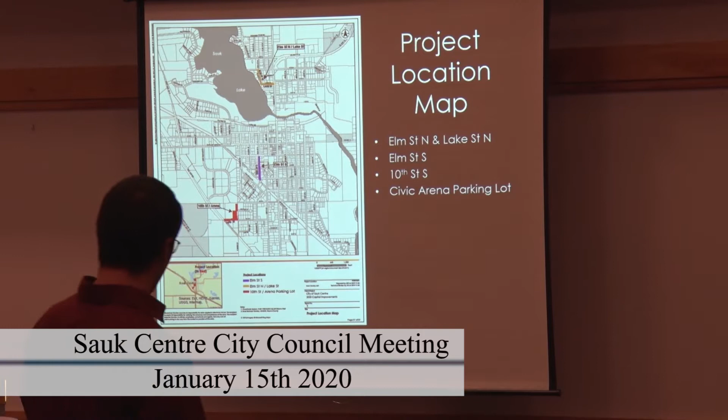You see it's kind of in brown - that's the Elm Street North and Lake Street North area. We have a central area in purple, that's the Elm Street South area. Then the red on the south area, there's actually two different areas: one is 10th Street South, which is the East-West street there, as well as the Civic Arena parking lot. So that's the areas we're talking about with this public hearing.

Existing infrastructure condition: the North Elm and Lake Street area water main and sanitary sewer is aged, installed originally back in the 1950s for most of it. Water main is undersized for regional system distribution. That was identified way back in 1995, that we don't have enough fire flows in that area for firefighting needs. Storm sewer drains directly into Sauk Lake without any treatment, and also lacks adequate structures to provide for drainage right at that corner.

The streets are aged and deteriorating. There's no flexibility, the pavement is cracking, the foundation is failing. They're old streets. Lake Street is also a narrower street, about 4 feet narrower than most of our streets. Normally our residential streets are 36 foot face to face. You'll see the design we're thinking about for this in a little bit.

South Elm Street water main and sanitary, once again it's aged and failing, very old in there. There's numerous sanitary backups that have occurred there. Jetting happens - we have to do that multiple times a year just to keep the sanitary sewer flowing through there. A lot of roots and those kinds of things are problems in that area. Once again, the water main is undersized in that area as well.

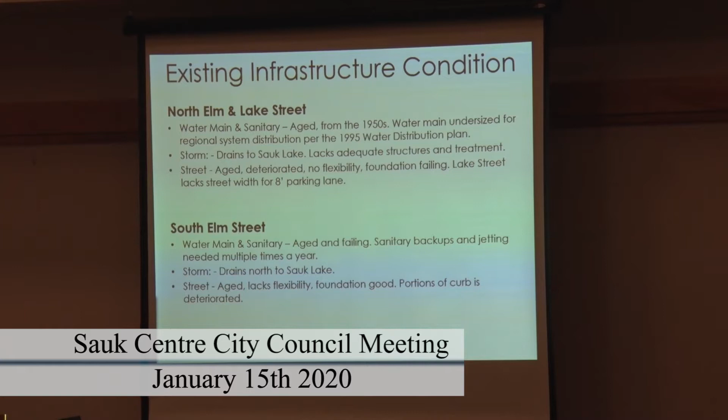Storm drains, once again, drain directly into Sauk Lake. We've dealt with some of that through other projects that happened before this for South Elm Street. The street itself, once again, is aged, alligator cracked, and lacking its flexibility. The pavement is simply worn out, too worn out to do a mill and overlay any longer. Portions of the curb are also deteriorated in that section.

10th Street South: in that area, the water main and sanitary sewer, PVC, is actually in good condition. It wasn't put in too terribly long ago. Everything is fine from a utility standpoint. The stormwater, the curb drains down to Beltline and goes into the ditch through there. No real issues with stormwater there.

The problems on 10th Street is the street itself. It's aging, deteriorating - actually deteriorating prior to its life. There's no flexibility in there. The foundation essentially is failing due to groundwater issues, which I neglected to mention in that north project. Primarily, we believe that's related to groundwater issues as well, causing the street to fall apart through those areas. We see the same thing in our parking lot area across the street at the Civic Arena. It's the elevated groundwater, not allowing structural strength below the pavement, and the pavement is failing and falling apart. So it lacks sub-drainage.

The Civic Arena parking lot is similar. It's aged, deteriorating, we don't have the flexibility, we don't have that foundation drainage. There's too much groundwater in there - it's close to the surface, and we don't have strength for that foundation in order to hold the traffic up above it. So those are the issues through there.

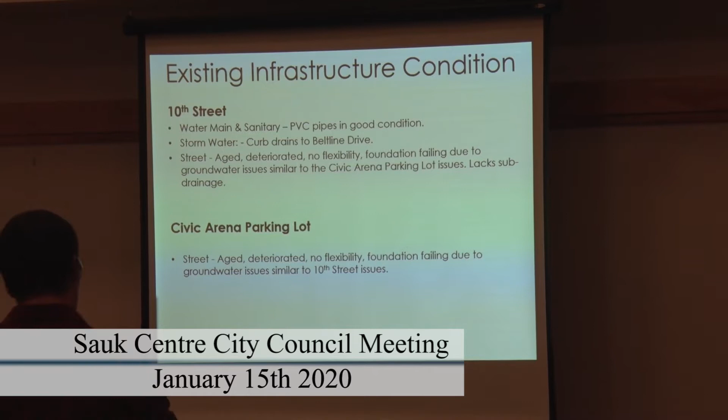I'll walk you through more of the proposed improvements we propose on these project sections. For the north, Elm Street and Lake Street, we propose to replace the sanitary and water mains. The existing water main is 6-inch, we're going to increase that to 8-inch for fire flows. New services out to the right-of-way. We propose to replace the existing street section. Lake Street is an existing roughly 30 foot width, and Elm is 36. There's two options for the Elm Street portion that I'll walk you through in a little bit.

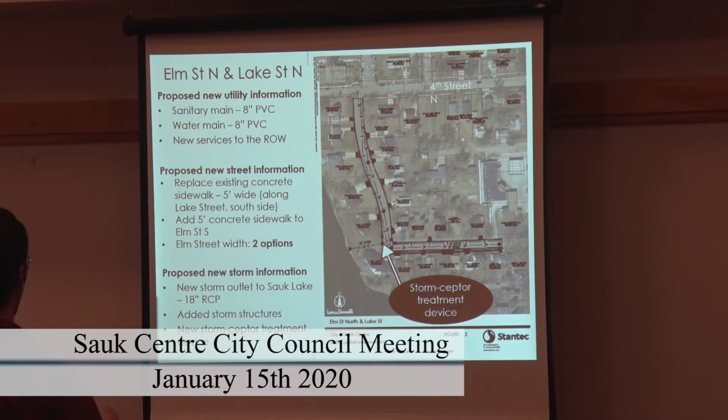We plan to replace the sidewalk along Lake Street, and another option is to add sidewalk on the west side of Elm Street and connect it up to 4th Street. So that's being proposed as well. The existing storm sewer currently drains to Sauk Lake. The plan is to add a few more structures in the low area to adequately drain that, to help with some larger events, to get the water out more quickly.

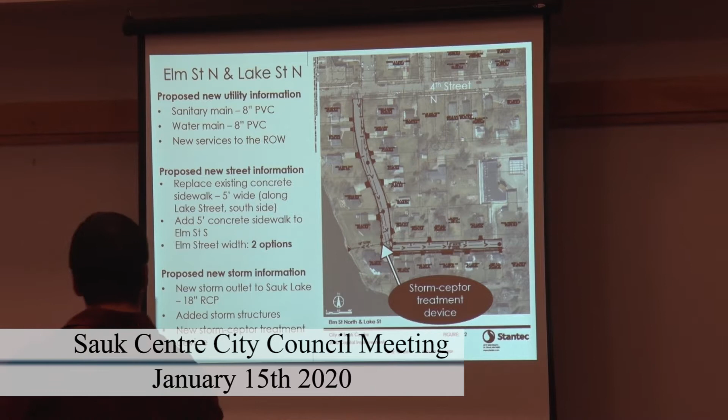So this visual shows you the existing right-of-way on Elm and Lake. The current right-of-way on Elm is 40 feet at its narrowest. Currently it's not wide enough for us to do our construction. The current right-of-way width is this blue line here. The curved greener, yellower line is existing curb.

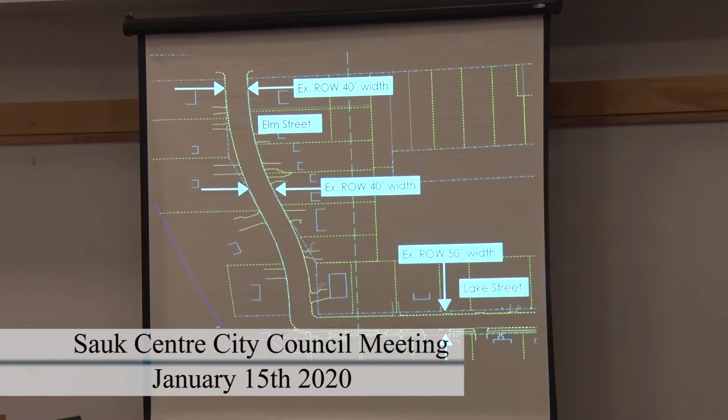In our proposed options, we have additional permanent easement included. The existing right-of-way on Lake Street is 50 feet wide, so there we have enough room to replace the 32-foot wide road.

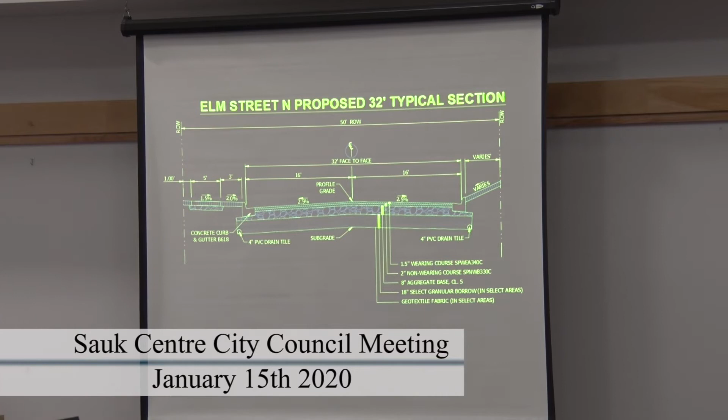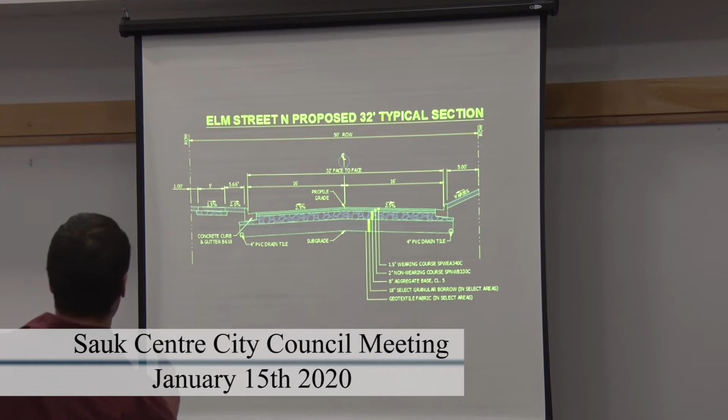The other option is to go 60 feet wide for the new right-of-way, which would be a 36-foot section. So the two options for Elm Street North are a 32-foot wide section or a 36-foot.

I have another graphic here to show you. This is the 50-foot wide right-of-way. We propose to purchase 5 feet on both sides to get to a minimum of 50 feet. There we can fit a 32-foot wide roadway face-to-face. The boulevard would end up around 5.5 feet with the sidewalk on the west side.

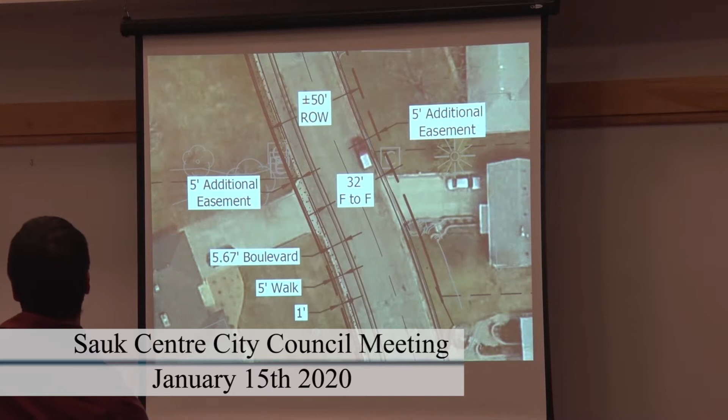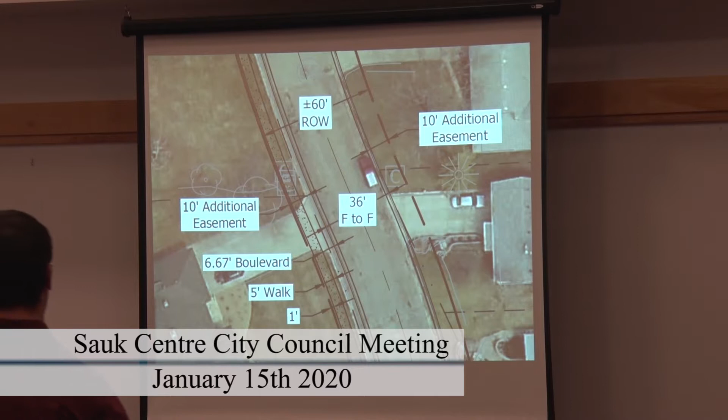The other option is 60 feet wide, so 10 feet on both sides to get to that minimum 60 feet. The boulevard would end up around 6.5 feet with the sidewalk again on the west side. So those are the options for Elm. For Lake, we think we can go with the 32-foot wide one, but we can come back to those two options and discuss further along.

If we jump to the Elm Street South portion of the project, there you can see the two blocks that we plan to reconstruct. We'll be replacing the sanitary, the water main, and services out to the right-of-way.

This section has a 36-foot wide roadway. We plan to replace it again with a 36-foot wide roadway, basically the same as it is today, with sidewalks on both sides.

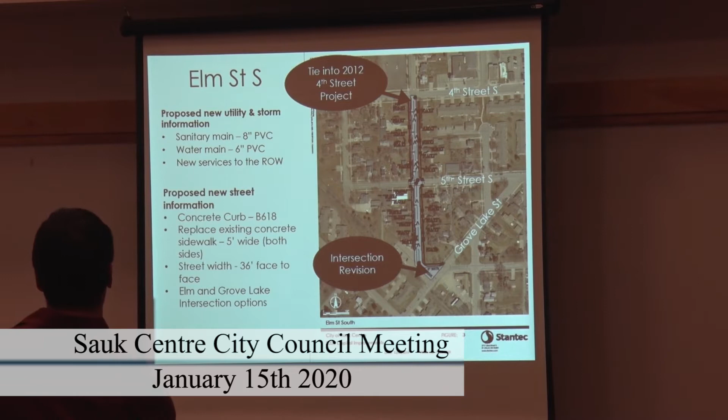The options for this one are on the south side, the intersection with Grove Lake. We'll be showing you two options for that intersection to better direct traffic. Right now it's all pavement, and there's no real direction, so we're not directing traffic there very efficiently. So we propose two options for that.

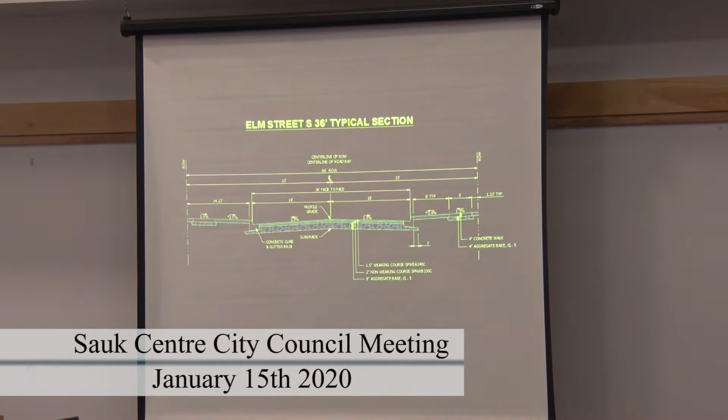This again gives you a profile picture of the Elm Street South roadway, so you can see the sidewalk on both sides. The roadway face-to-face is 36 feet, and the boulevard will be a typical and desirable 8 feet wide.

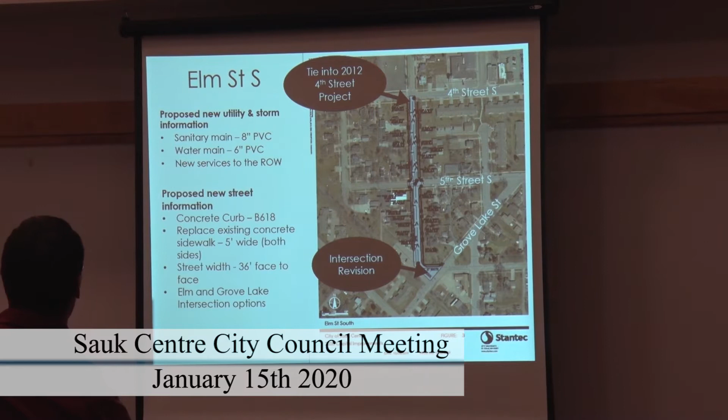Option 1 also keeps the center line aligned with 6th Street. Option 2 is in accordance with the city ordinance on intersection skews, and the wording says 80 degrees is the minimum, perpendicular is desired, which we have proposed for option 2.

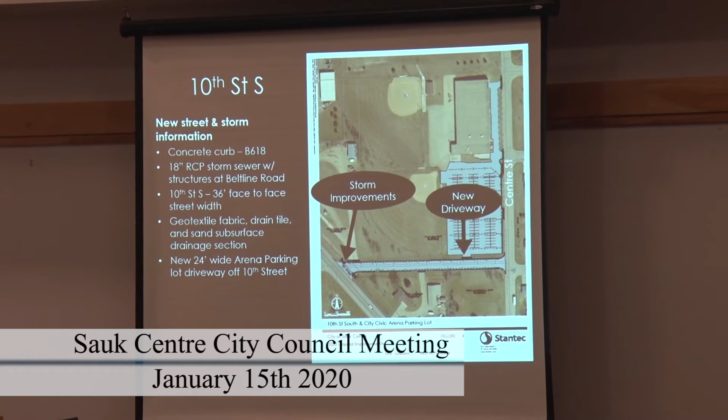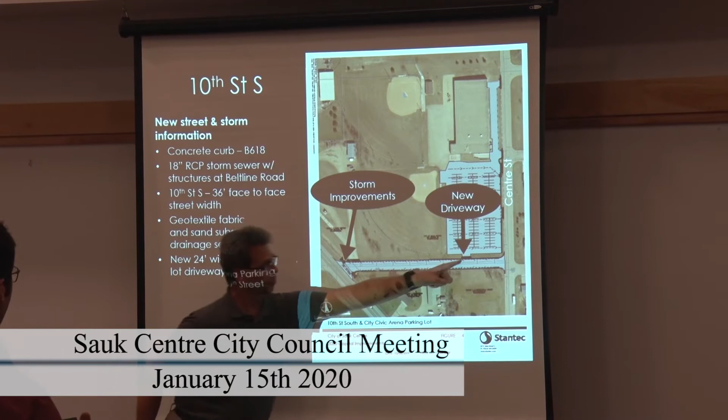What a sub-drainage section will do is wick the water away, allow it to drain through drain tile, and leave the aggregate base of the roadway high and dry with its strength. So that's what we propose. It's a 36-foot wide roadway today, and we propose the same roadway back. We would add a new driveway to the parking lot arena area for additional exit and entrance there. We would also add a couple structures along the Beltline roadway there on the left side of your screen.

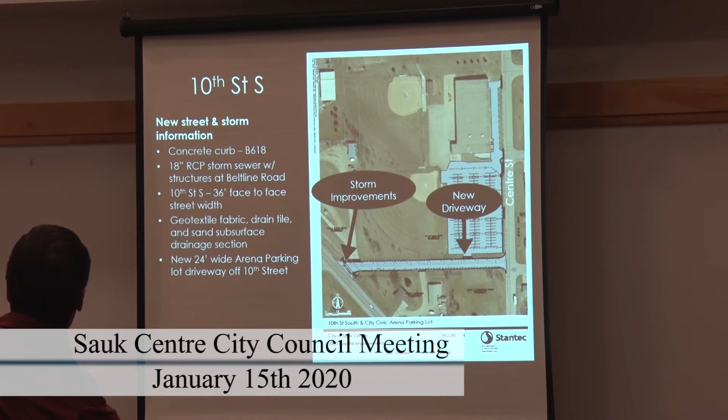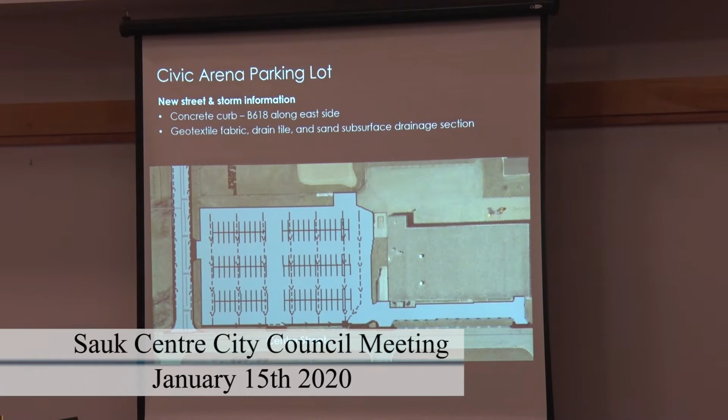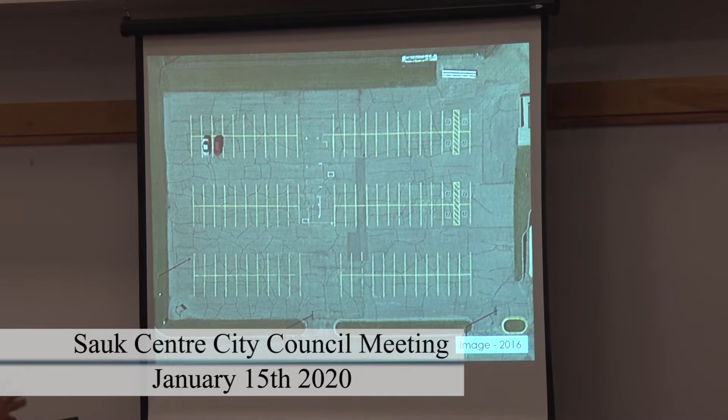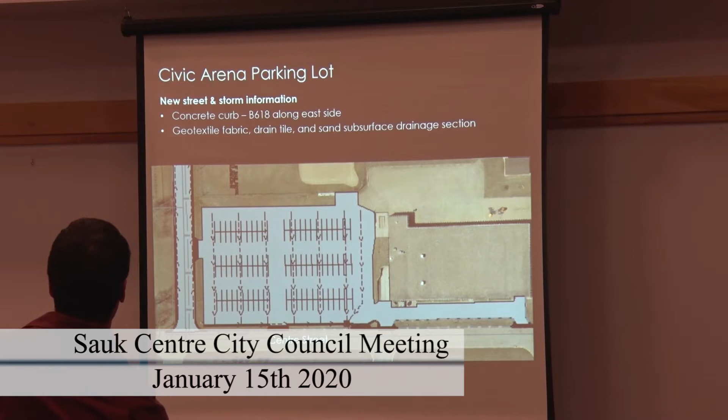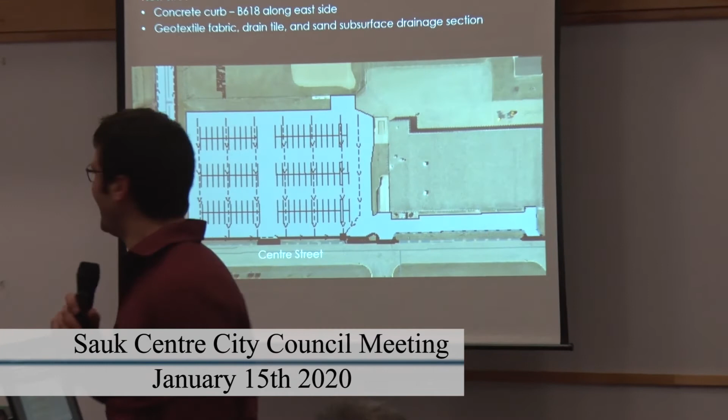Sure, so this is kind of typical. We've done this before in parking lots. The drain tile lines you see would be about 4-inch PVC drain tile we propose using. They would connect to a larger drain tile on the south or east side, the bottom of your screen, and go to the storm sewer. It's the same kind of concept as they use in field drain tile systems. You want to collect that water and get it to there. I think the spacing on that's around 50 to 75 feet, which is pretty typical for that kind of area.

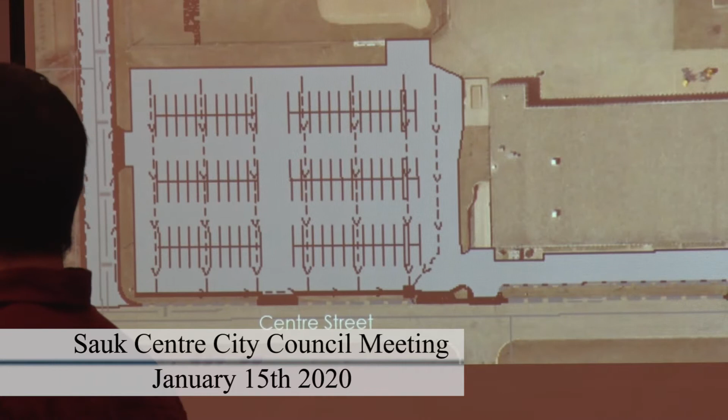On the street, if you think about it from that perspective, it's 1.5 times if we did it on either side of the street. It's a small picture and it kind of makes it look like it's real close, but it's really not. The bulk of the costs for the Civic Arena are going to be the materials, the bituminous, the Class 5, and the sand. The drain tile will be a smaller portion.

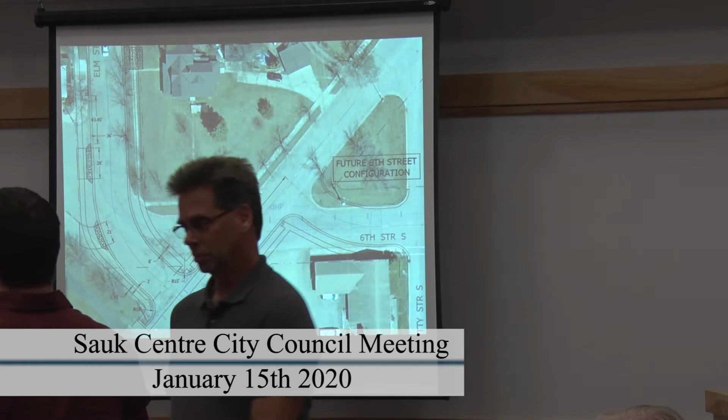Sure, so right now we propose just a grass area. There may be a chance to do some - I haven't looked at the soils up there yet - to do an infiltration pond. We may need some storm improvements in that area and intersection. We haven't got to that in our design yet, but at this point we'd be looking at just a grass area. And because that is right-of-way, that could be vacated and dedicated back to the adjacent landowner.

So that could be an option if we didn't use it for any other public purpose. The 6th Street shown on this configuration on the east side really isn't meant to be done with this project. It could be, but it's not meant to be — that's why the label says future. So if you can go back to the other picture.

What I was wondering, and maybe Ben can speak to this, is when it comes to plowing and road maintenance, the fewer corners you have to go around with the plow and wing, the better. What's your feeling, Ben, as far as your guys having to work around it? This option here is a lot harder to plow and maintain versus the other option. So the other option would be better for us to plow, for sure.

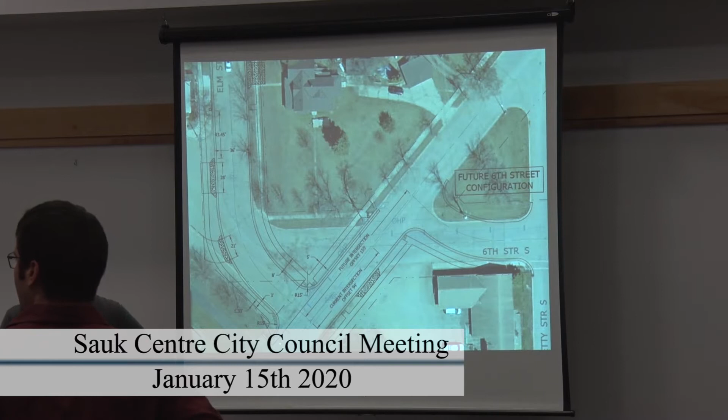One thing I wanted to point out, just so everyone knows, there is kind of an alley that goes back — there's a couple garages back in here. So that's what you're seeing right here, that's how that would enter back onto the street. So it's not cut off from those folks, either way.

So the parking lot by the ding dong — would that be their requirement to maintain and do snow removal on? It wouldn't be us anymore? The part that's off the street, right — we would basically no longer be maintaining that.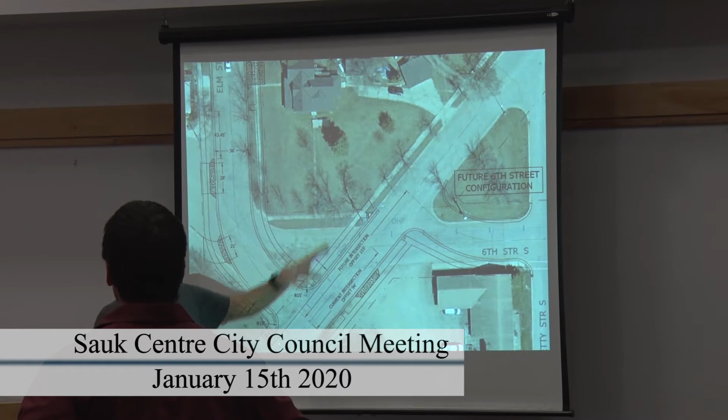Technically our right-of-way — this is actually Elm and 6th. In reality, the right-of-way is currently Elm Street and Sixth Street. So technically this piece is Sixth Street through here, but it just sort of all meshes together into one big intersection. This would sort of clean it up. I'd say that's Elm, and in this option, that's probably no longer Sixth Street, that's Elm Street through here. We'd potentially get rid of that right-of-way through here, or at least not utilize it as right-of-way.

Okay, does the council have any other questions? I have a question on the Elm Street North right-of-way easement purchase. This is my first street improvement project — how does that process work? Do we have to purchase that from the existing landowners?

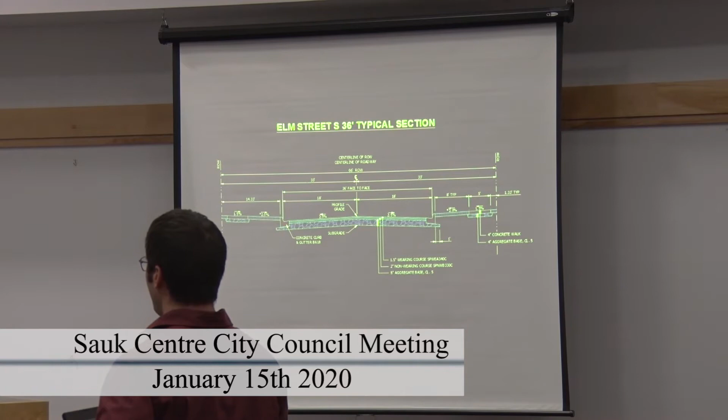The way easements work is we first come up with what the easement is and describe it. Then we work with the landowners for a fair price — that's all done individually with those landowners to come up with a cost for the easement, and we purchase it. They're all individual purchases. And remember, these are easements, not full takes — however, with right-of-way, generally you pretty much use the majority, so you're probably buying nearly 100% of the use of that land.

I wanted to comment further on the 2018 project, which you may not have been part of but maybe caught the tail end of. We had some easement purchases up there in the alley between Lakeshore and Elm, so it'd be kind of the same process as that.

I have some rough costs for these easements. The 5-foot easement would be around $9,000, and the 10-foot easement total would be around $18,000, based on the similar cost we paid on that 2018 project. That's total, not per parcel. And those are included in our contingency of the costs we already showed you.

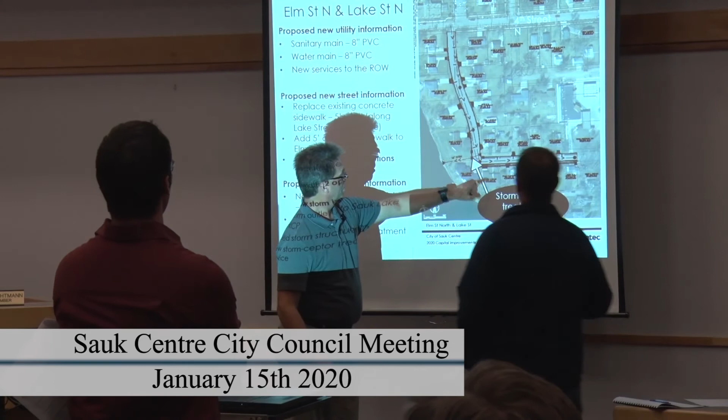Can you go to the graphic so we can show the house on it? On one of the other slides. Right there. Could you point to where he's at? He's right on the corner, I'm right here on the corner, inside corner. These are my two, right there, those are my two. So you take 10 feet off that now.

The south side on Lake Street, to me, that's not that big of a deal. I have some trees along there. The simple answer is the roadway on that side is not going to change. In fact, we're looking at the curb being essentially right where it is now, so there really wouldn't be any change on that side.

So don't think that whole thing's going to be used, like it's going to be a street in that 10 feet. No, that becomes a boulevard area through there. So it's still essentially exactly the way it is now in your particular case.

On both sides, both streets. The only difference would be on Elm Street, on the west side, where there would be a sidewalk. That really would be the only difference with the 36-foot wide scenario street. There'll be a sidewalk on that side, but everything else would be the same.

Essentially, they're not going to widen it at all. No, the street will be either narrower if the 32-foot option is chosen, or it'll be exactly the same as it is now. I'm just trying to understand, because on your graphics you show a change between a 5-foot easement and a 10-foot easement. So I'm trying to understand, is it going to take 5 feet or 10? You're saying it's not going to change anything, but if you widen the street, how is that not going to change it?

But the street now is 36 feet wide. Oh, okay, so if we go with the 36-foot wide option, the road will be exactly where it is now. It'll just be a new road in the same exact location.

Now, on your side, specifically to you, the easements that will be up and through here, if anything, it would be very minimal. It might not be anything, actually, on your particular property through here. If you can see where my driveway is...

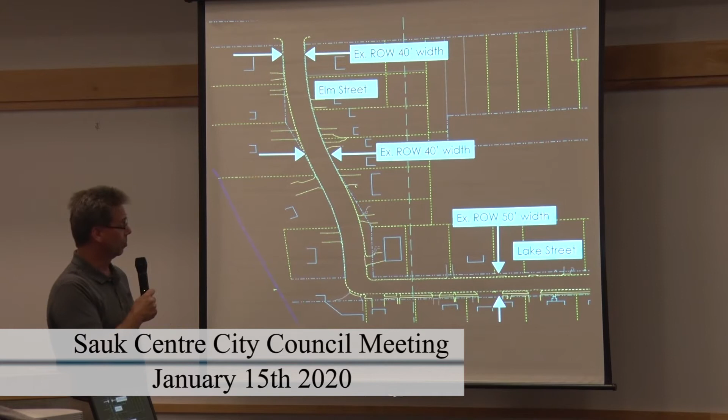North of that, those are the steps that are in front of the house, so you can see that if you come in towards my house. But we won't, as I mentioned, we will not be coming in. The road is staying right here, so nothing is moving physically towards your house.

The only thing that would actually be dug in through here would be the services. I'm not sure if your service comes here or comes off here, but I understand that there's going to be some changes coming from that.

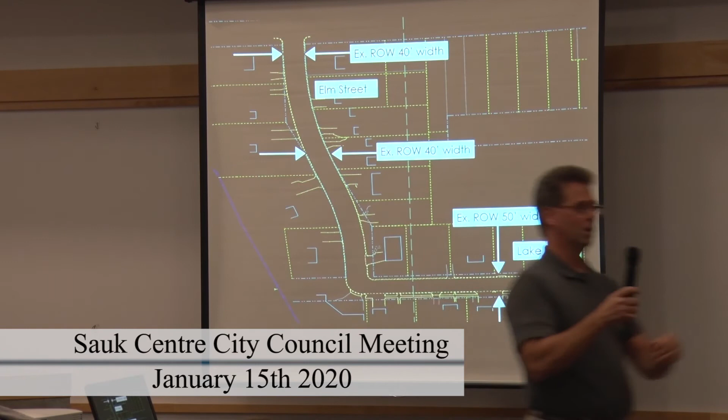Get this so you can be picked up for the folks at home too. I know it was mentioned that this would be available online, because my wife is going to have questions on this, and I want to be able to explain it to her. We should be able to get it to the city, if we have a jump drive, even tonight, but tomorrow we can get it here, and as soon as we can get it uploaded, you should be able to see it on the city website.

So my last question is, and I apologize, I think I emailed Ms. Willer about meeting with you about the notice I got about the proposed assessment amounts. My question is, is that going to be a one-time charge, or are they going to spread this out over a number of years? Generally 15 years. 15 years, okay.

And my question, and my reasoning for asking that, is because my assessment is over $15,000 for my two parcels. And if I get that as a one-time bill, I'm going to have to sell my house because I can't afford that.

Just for everyone, in general, assessments are split over a term that the council ultimately decides. It can be anywhere from 10 to 15 years. Typically, recently, everything's been 15 years. There's interest on that, and you pay it twice a year with your taxes. You can pay it early too, if you have extra money, you can put it towards that anytime, since it all goes through the county with your taxes.

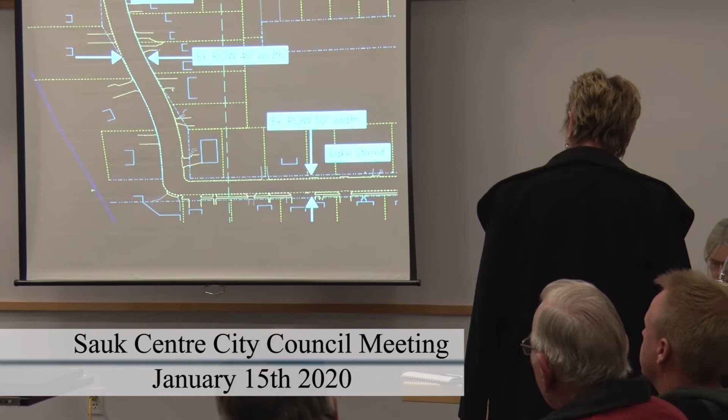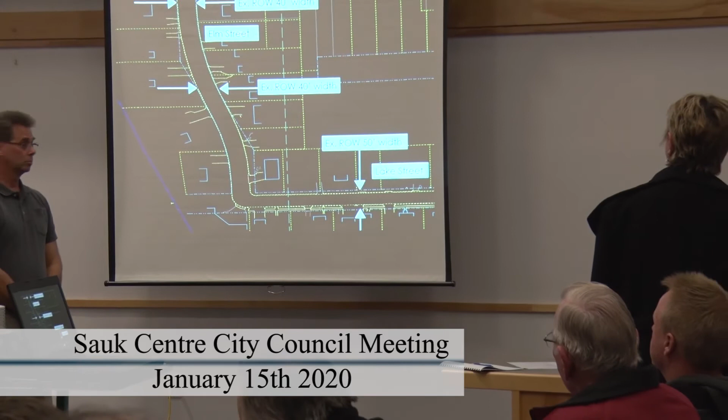So that sidewalk that's currently there, is that going to be replaced? And then the new sidewalk being proposed would continue up the west side of Elm Street. So then our driveway, is that going to be shorter? The apron going into the street? No, the driveway will be exactly the same length, but the end would be redone. The apron at the end would be replaced as part of this project, and the sidewalk through there would be replaced too. So basically, everything from the sidewalk to the road would end up being replaced with the project. Does that answer your question?

Thank you. I have a question. I'm Barb Carlson, I live at 315 North Elm Street. Question number one, do we have to have a sidewalk? We've never had one. My other question is, I still don't understand how you're going to keep the car wash from washing out the street.

So the first question is whether there needs to be a sidewalk on that side. That is something new that the council is considering. Tonight we would hope to get some direction from them as to whether they wish to continue with putting a sidewalk through there, so we can move forward assuming they want to proceed with the project as a whole. In terms of the car wash, yes, we know there's some erosion occurring on that driveway. We don't really go far enough there currently. There are a couple issues with the car wash and erosion that need to be taken care of, working with them directly.

So here in the middle is our aggregate base, our bituminous, and this is our sand section. Now for a roadway, we typically install the sand section 1.5 foot thick with filter fabric, basically a separation layer, so no clay can come up, just water can come up. So this sand section can take water from any direction - from up above, from underneath, from the sides.

And then we crown it. We crown our subgrade, so if any water comes into it, it'll drain to the sides, through that fabric, through the sand, and into our drain tile. For Elm Street, the whole road currently drains west to Beltline Ditch, so that drain tile would follow that slope, the slope of the road west, and get to the ditch so it would drain out.

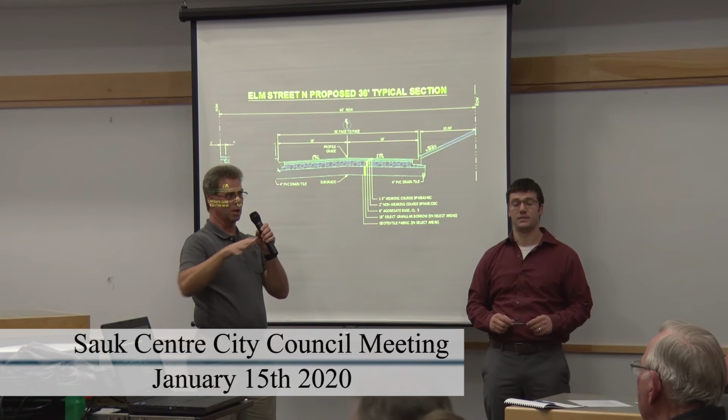So in the same system for the parking lot, we would use that. The parking lot drains essentially from northwest to southeast, sort of at an angle across there. And imagine, if you can picture this kind of flat, but now we have the slope of the grade of the parking lot itself.

So all this sand cushion, all that water is down below, and we provide - this is essentially a controlled drainage layer - so it takes that water out. It's water that kills the stability of the upper layer, because this gets all saturated.

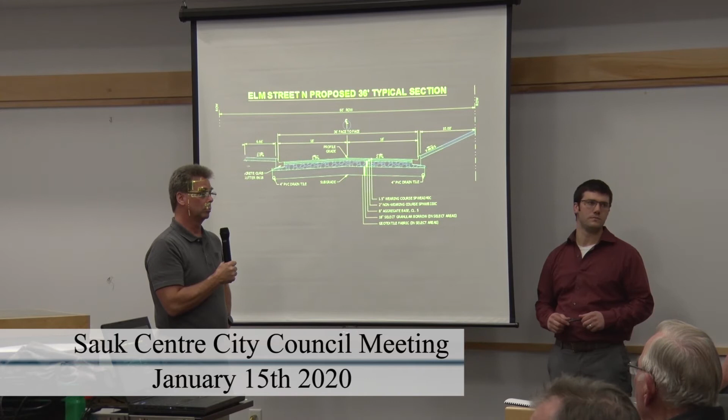The drainage is not cut and dried, like you say. The drainage actually runs through the two ball lanes, between the two ball lanes, out through my property, and out the driveway, and to the ditch on the outlet.

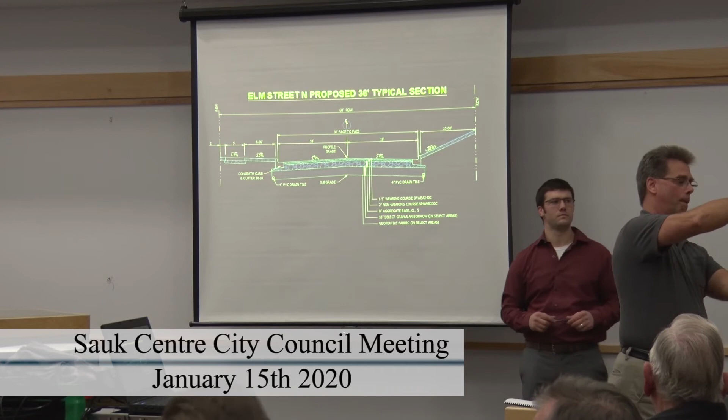So your drainage is from the west, yeah. It all drains - the drainage from up there, a lot of it goes west, believe it or not - because it just pulls between both ball diamonds and everything else.

And I don't think you're gonna get a big enough sand barrier up there to drain - a four inch drain tile is not gonna do it. That's like putting a Band-Aid on it. That is not gonna drain.

Well, remember in the parking lot we have a series of those. In the road, we could go to a 6-inch - it's virtually not much extra money in order to do that. But there's a lot of water that can run through there.

And I know it's hard to believe that, you know, we're essentially on the top of a hill and it's a swamp. There's got to be some sort of, whether it's an artesian type structure that's underneath it, that's pumping that water up through there.

So, right, we have to have a controlled drainage layer. That's the only way to make this work, because if we allow that water to come to the surface, then all the asphalt just breaks up because there's water on it all the time, so it just doesn't work. What I'm saying is it doesn't even pay to do the street project until that parking lot area up there is really addressed all the ways.